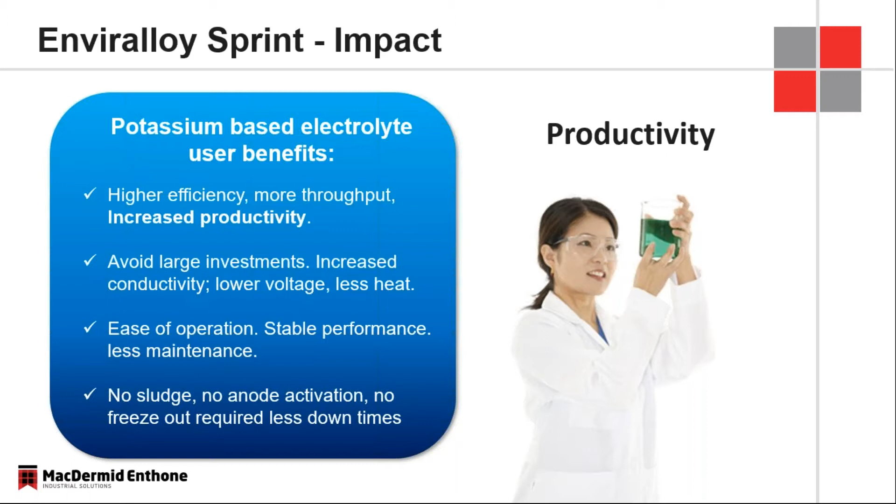We do not have that same issue with Enviralloy Sprint. It's a smooth, nodular-free, semi-bright silver-colored coating. One thing we know is that this is a particularly bright bath. We know that the increase in efficiency will change the grain structure.

I have some pictures coming up in a couple slides, but as a deposit is more smooth, less nodular, your eyes are going to see a brighter surface like a mirror, and pick up a brighter deposit rather than a duller deposit that might be a little bit more matte or not as refined. That goes to the fact that we are using a potassium system at a higher efficiency level.

We are still going to maintain excellent corrosion resistance, including higher corrosion resistance after heat treatment. We're going to have standard alkaline thickness distribution and alloy distribution that we have obtained from other systems. We're going to maintain that sweet spot of about 12 to 15% nickel, which is what is required by most OEMs.

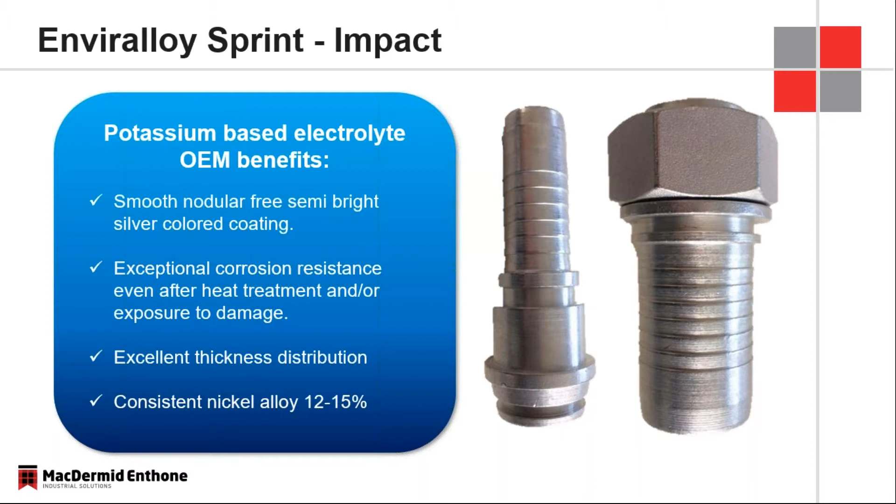So back in the sodium systems, we're looking at an efficiency of about 35 to 45%. When baths are made up brand new, they're going to be higher, and the efficiency is going to be reduced over time, pretty much because of sodium carbonate, but also to a lesser extent some of the breakdown products associated with the organic additives in zinc nickel systems.

A few years ago, we improved our sodium systems to raise the efficiency to approximately 55 to 65%. But more than that, we were able to reduce some of those breakdown products.

And breakdown products, as anybody who has run zinc nickel knows, are extremely important. You basically don't want to destroy the heartbeat of the system, being the systems that have these products in an inverse relationship to good versus bad. For instance, if you have a complexing agent, which all alkaline systems have, that's the good product. The breakdown products from those complexing systems really inhibit the efficiency, slow down the system, increase specific gravity, and need to be removed. Also with sodium carbonate, it has to be frozen out.

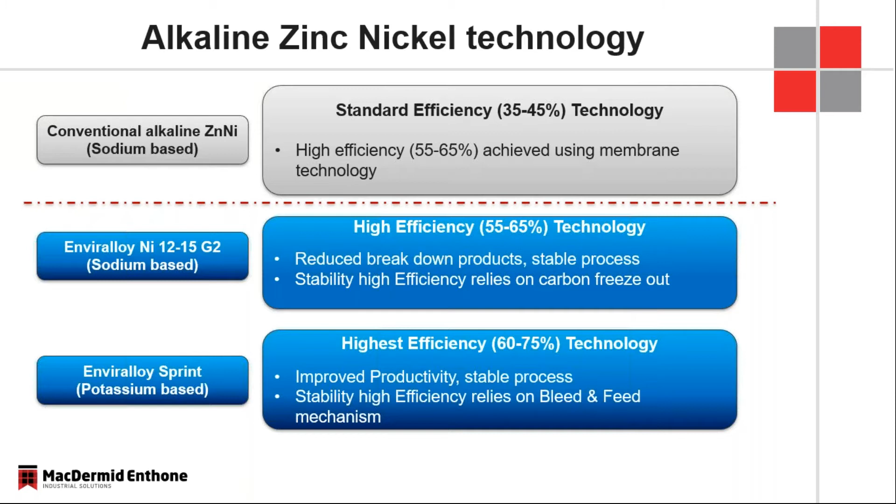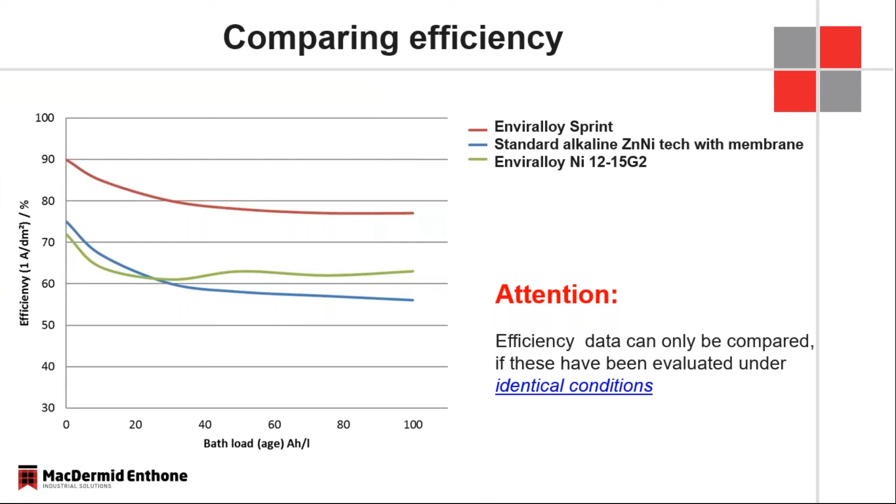Talking about numbers and efficiency, you can see that over time, standard alkaline technology will be reduced over a bath aging of approximately 100 amp hours per liter. The improved 1215 G2 is similar, although a little better, because it doesn't break down as much of the organic components. The Sprint process does have a reduction in efficiency, but we're starting out at a higher level, and when it does reduce, it levels off at a higher level of efficiency. So the benefits between 60% and 80 to 90% are significant. These comparisons are made against each other under identical conditions.

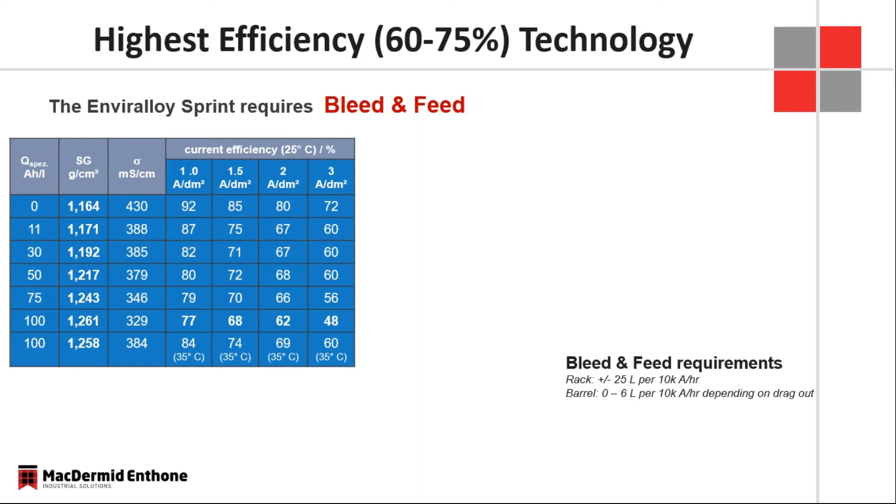So when we talk about the need for bleed and feed, what are we talking about? We're talking about the specific gravity of the solution, and breakdown products that take up space in that solution. There's only so much stuff, so to speak, that you can put into a gallon of solution, whether it's water or zinc nickel solution. At some point there's just too much that it can't handle and can't be solubilized, and things start to split out. So we monitor the specific gravity.

As mentioned, carbonate will not freeze out on Sprint because of the potassium hydroxide. But we can monitor the solution in an overall sense, not just the analysis for potassium carbonate, but an overall sense of how much loading we have into that solution, and we can follow that by specific gravity. You can see on the lower portion of this slide a rate of approximately 25 liters per 10,000 amp hours in a rack operation, and in a barrel operation, significantly less. We'd like to get down to where, if productivity is high enough, we don't need any reaction to a higher specific gravity. But if we do, we could be looking at as much as only 6 liters per 10,000 amp hours.

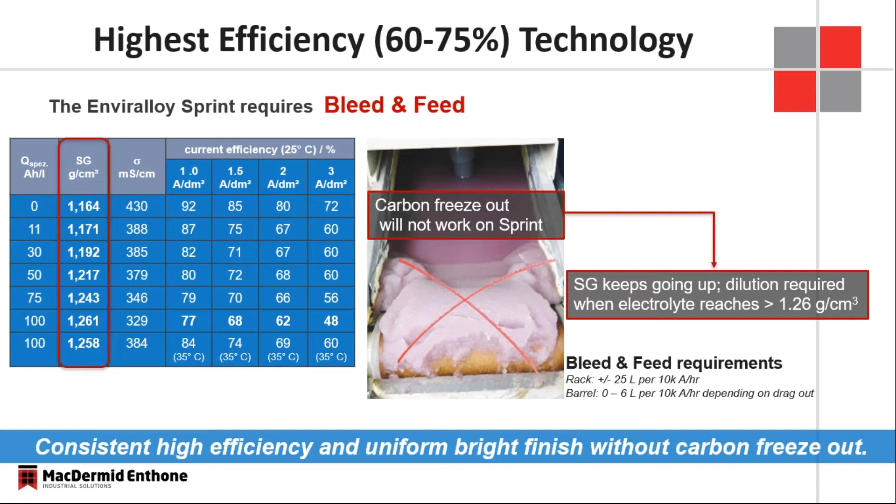Again, Enviralloy Sprint is designed to improve conductivity, and that's what we're talking about here. Improved conductivity equals improved efficiency equals faster deposition rates. I have some customer examples that I'm going to explain later on in this talk. The reduction in voltage and heat development — I found that out firsthand when I first started looking at this process in our pilot facility, for two reasons.

I was using a smaller type of tank, but I was only drawing 1 volt. I had a 6x6 inch barrel in a pilot lab facility drawing 1 volt, and I had plenty of amperage, but I noticed the barrel was not gassing. In a standard sodium-based alkaline zinc nickel solution that's brand new, everybody knows it's bright purple, and when you turn on that current, the bath almost explodes with hydrogen. We're producing so much hydrogen because of the lower efficiency that you can see a tremendous amount of gassing in the tank. When I was doing my trials, I turned on the current, only saw 1 volt, and saw no gassing coming out of the barrel.

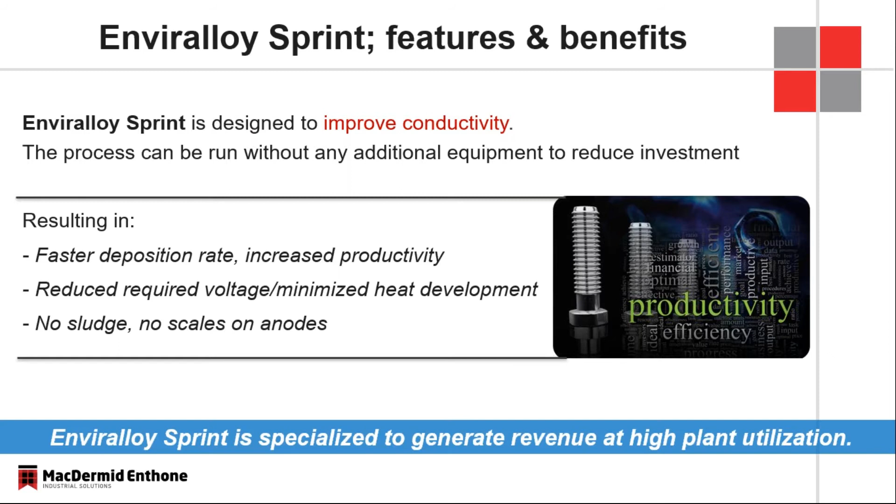You don't have the same issue with this system — no carbonate precipitation, high efficiency, no carbonate on anodes. Sodium carbonate will come out of solution very readily; it's one of the first things to get kicked out, and that's part of the sludge on the bottom, even though it's at a warmer temperature. But more important is the oxalate on the anodes themselves, or any sort of material on the anodes. We all know the anodes need to be clean and efficient, and in sodium systems this issue needs to be addressed, or your solutions will not operate properly. Again, higher productivity, less downtime.

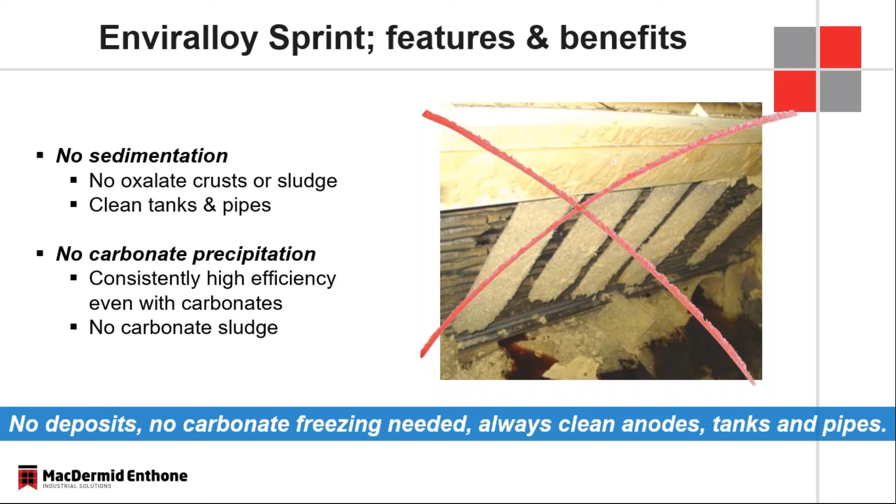A nice benefit about the Enviralloy Sprint is that it can be run rack and barrel out of the same plating solution. Most conventional alkaline zinc nickel systems require different metal concentrations and, more importantly, different brightener packages. Rack operations contain more anti-burn, high current density type components, while barrel, because you're plating at a lower current density, have lower current density additives in place of anti-burn components. In Sprint, you can run the same bath and do rack and barrel processing at the same time.

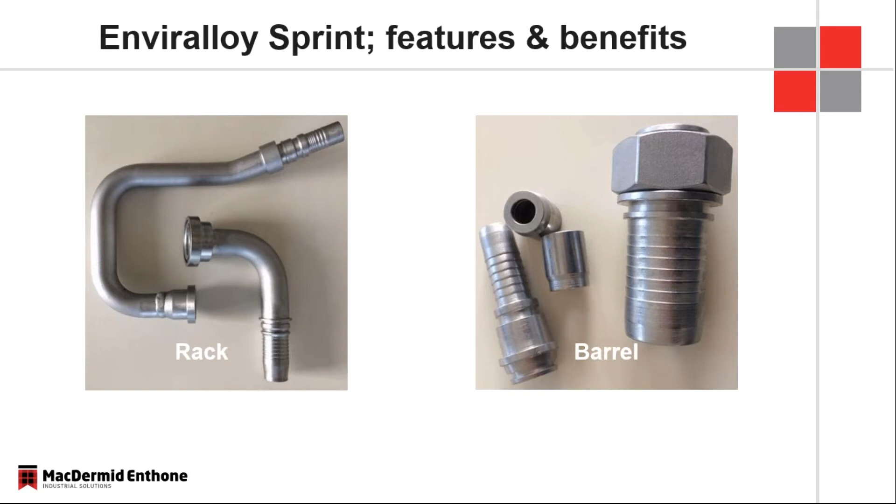So what does that mean for an applicator or an OEM? The less additives that we need or are required to put into any plating solution to add grain refinement have a possibility of being overdosed. If you can decrease the amount of grain refinement additives needed in a solution to produce a brighter deposit, you reduce the possibilities of blisters, poor adhesion, or delamination, particularly in any zinc nickel system. You saw some tubular goods on the previous slide. A lot of people like to plate and then post-form parts, bending, crimping. The Sprint, and we have seen this in a few operations, is much more ductile than conventional systems because the organic additives required for a bright finish are reduced compared to conventional sodium systems.

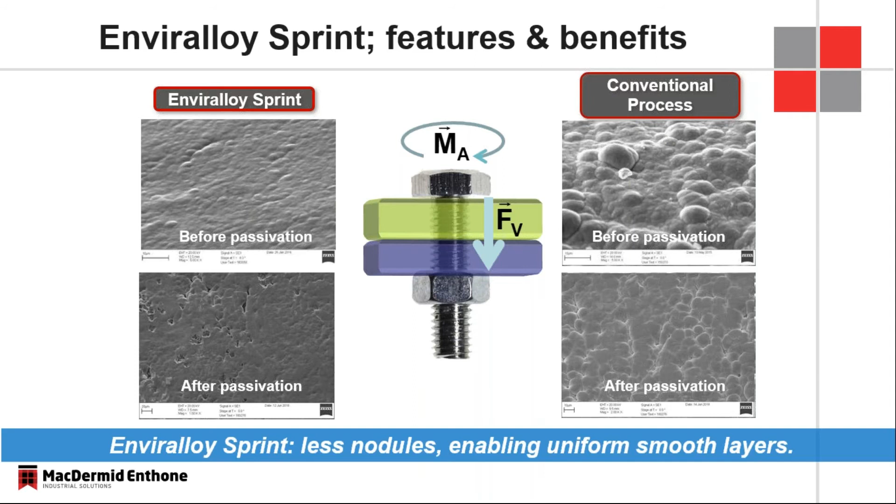So how do we operate this bath? Fairly standard operating conditions, except for the fact that you can run the Sprint a little bit warmer than you can a conventional system. Conventional systems at higher temperatures, that organic package, the complexing agents and whatnot, will break down significantly. Not with the Sprint process.

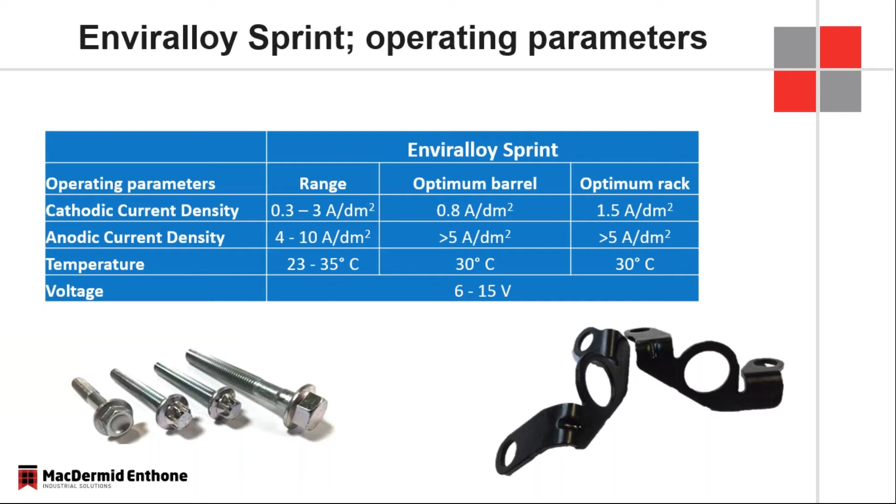One of the main characteristics that is very similar is the need for a high anode current density. That is still true with Enviralloy Sprint. 50 ASF and higher is recommended and needed for all alkaline zinc nickel systems, and that is the same for Enviralloy Sprint.

So when we start talking about additives, you'll notice that I've been mentioning the word Enviralloy Sprint, and that's because we have learned something since this product was released a few years ago. One of the things we learned is that by starting to add in a product called Enviralloy 1215 Part B, which is an additive we use for our number one selling alkaline sodium technology system, we reduce the amount of needed add-backs of the carrier. And the carrier is your complexing agent. The term carrier in this instance is not like an acid zinc carrier where it's a wetting agent. This carrier is the actual complexing agent that holds nickel in solution at a pH of 13.

Under normal operating conditions, by introducing some of the 1215 Part B, we start to be able to reduce the amount of carrier that is needed, which significantly reduces the cost per pound, per amp hour, however you want to categorize it, reducing the cost of operation because carrier consumption is reduced.

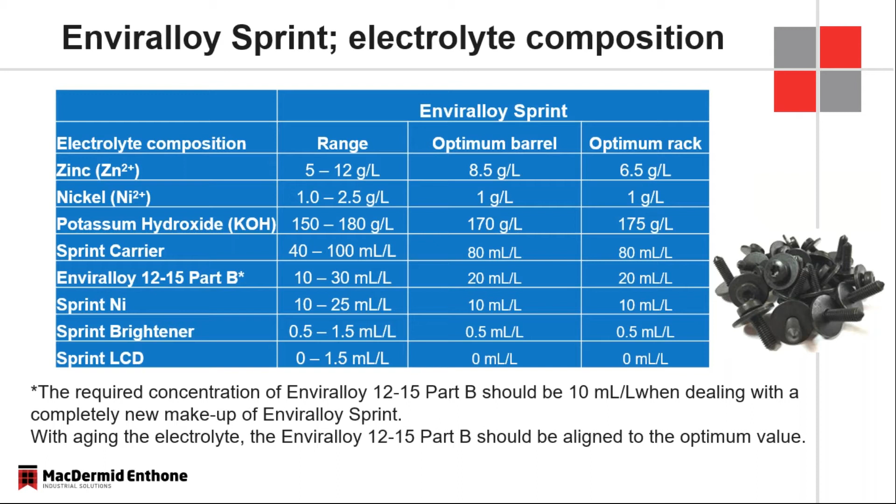The nickel additive is going to be one of your higher levels of consumption, and that's because that's what's getting deposited on the plating bath. It's not because we're plating out 30% more nickel. It's because we are productively putting through more solution, or more product, when you start talking about an amp hour basis.

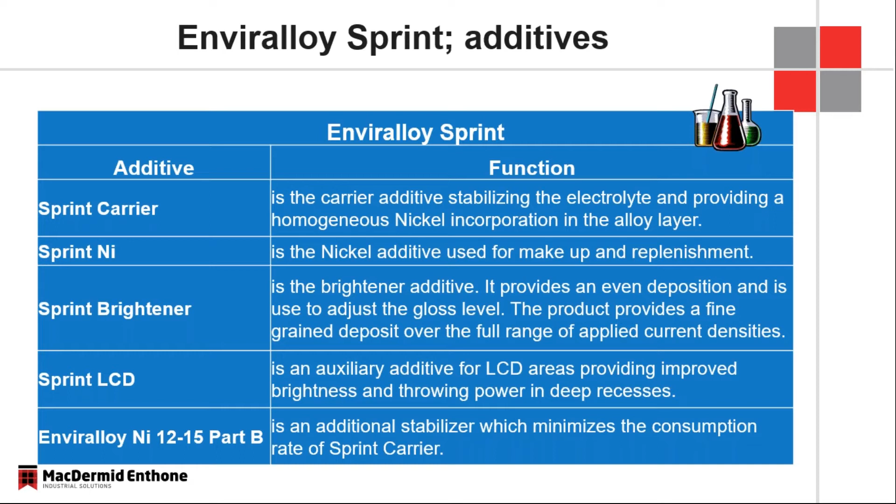So as I just mentioned, the carrier stabilizing agent, Sprint Ni, that's your nickel replenishment. It doesn't come off of an anode. It has to come in over the side as a liquid additive because it needs to be in solution before it hits the plating tank, or it'll precipitate. Brightener is a fairly standard brightener additive. LCD is low current density additives that are needed over time. And as mentioned, the 1215 Part B is just an additional stabilizer, and it helps to reduce the consumption of the carrier.

So what are we talking about for dosing rates per 10,000 amp hours? Looking at the first item, the Sprint carrier at 1.5 liters and the Enviralloy 1215 Part B at 1.5 liters, that's 3 liters per 10,000 amp hours. In the previous system, before our upgrade in technology, we were looking at rates of more like 4 to 5 liters of carrier per 10,000 amp hours. So we have significantly reduced the cost of operation for the applicator. Again, this is all relative according to drag out, rack versus barrel, and throughput.

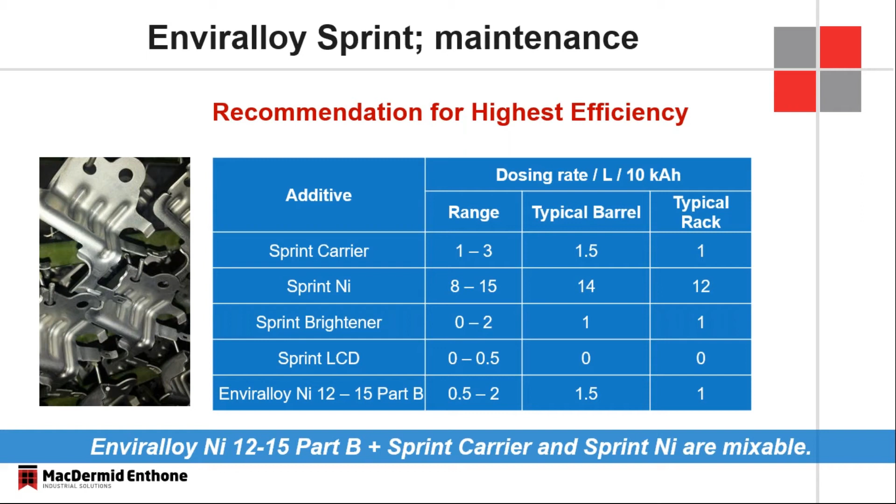As mentioned here, it might look like a lot of additives, but we really can mix the nickel, the carrier, and the Part B. That could be on one feeder, a second feeder for the brightener, and then the LCD would only be added as needed per hull cell analysis.

So this also goes to efficiency. This also talks about specific gravity. And since it is the number one cost driver, when we talk about 8 to 15 liters per 10,000 amp hours, we're talking about 20 to 50% more nickel consumption compared to the sodium process. That's because it's more efficient.

We don't need to have sticker shock by looking at that, but it's something that needs to be noticed. We are running more parts. More nickel metal is being deposited per hour. Therefore, that consumption looks abnormally high. But again, it's analyzable, and if you level off on a drag out rate, then we can certainly run on the lower side of that range.

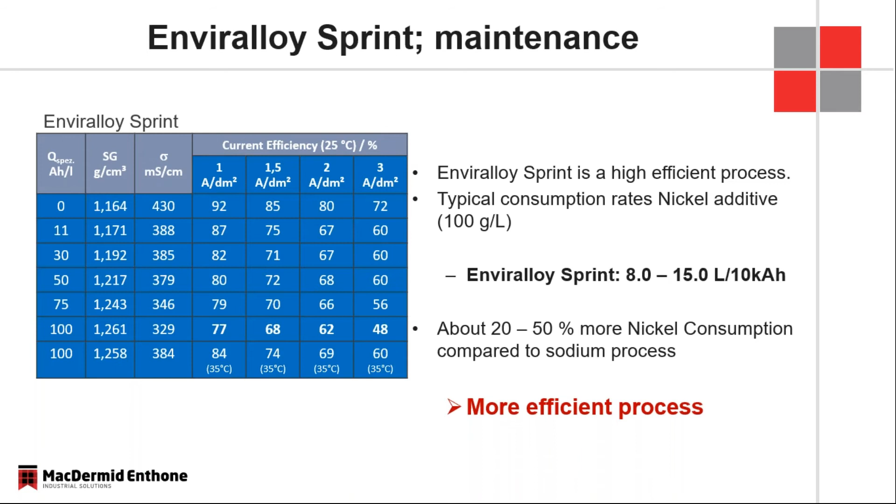So without overstating it, anode current density is probably the number one issue that you have to deal with when putting in a new line. Some of these complexing agents and products are very expensive. The last thing you want to do is purchase them, use them, break them down before they're ever functional, and then have to deal with the breakdown products.

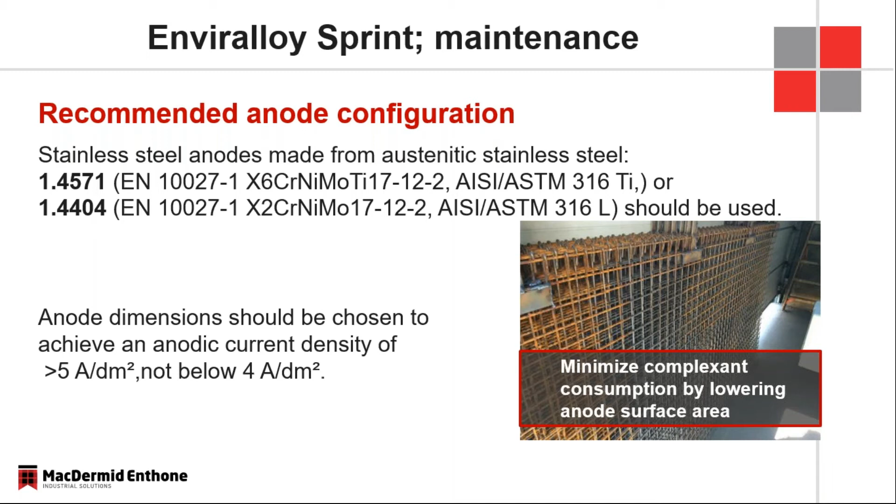And again, over 50 ASF is required, so a very small anode area. I didn't mention it, but it was on the last slide - we can also use stainless steel anodes. We prefer them to pure nickel anodes or nickel plated anodes, and that goes to the benefit, again, of breaking down the complexing agents in the electrolyte.

So in cases where we need to do bleed and feed, we are really just trying to maintain efficiency, trying to decrease the viscosity or the specific gravity. And again, that goes to increased conductivity. We're starting out on a high level - let's not go ahead and do anything that's going to lower it any more than we would expect.

So therefore, again, you can see on the graph with the bleed and feed at greater than 1.26 specific gravity, we're going to maintain that high level of efficiency. And if we don't, we're going to see a decrease down to below 50%. So again, 20 to 25% increase in production - that's what we're talking about here. That is what really gets this system to the top of the list of preferred systems for alkaline zinc nickel.

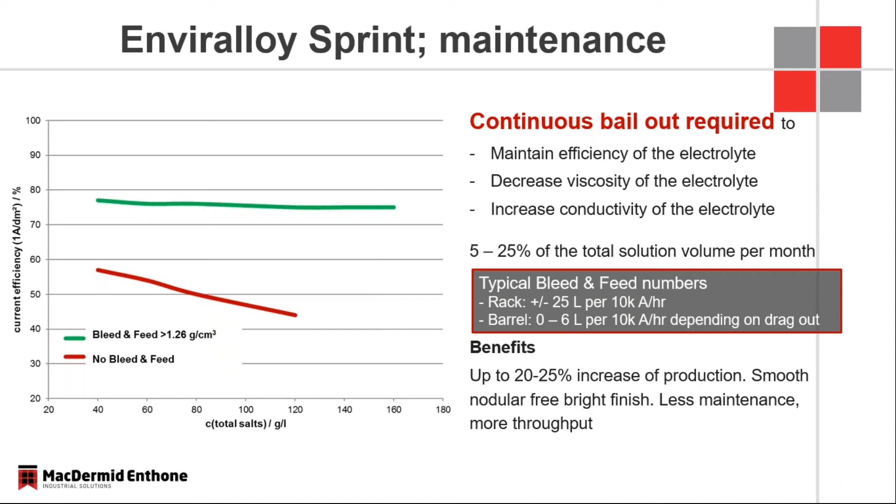The other thing before I talk about customer experiences, in generalities, what are we talking about? Fasteners, right? We're talking about plating fasteners in high production environments. When we start getting into higher strength steels, we all know that the OEM industry, the automotive industry, is reducing weight on vehicles. Therefore, they're going to smaller, stronger, high strength steels as fasteners to save weight.

We have applicators, and we know of instances where the initiation of a system that has an efficiency of 45% is not going to initiate on a 12.9 bolt. It's not going to initiate on a high hardened steel like a 12.9, or even some of these exotic alloy steels like molybdenum, or other metals and alloys that are put into the steel to increase that strength. The higher efficiency allows us to create faster initiation.

So right off the bat, if you're an applicator that plates high hardened steel all day long, you're not going to be plating for 2 hours because the initiation never takes off. The Sprint, we have seen and know that it can plate high hardened fasteners very, very readily on a very consistent basis, and that's another extremely advantageous point to this system.

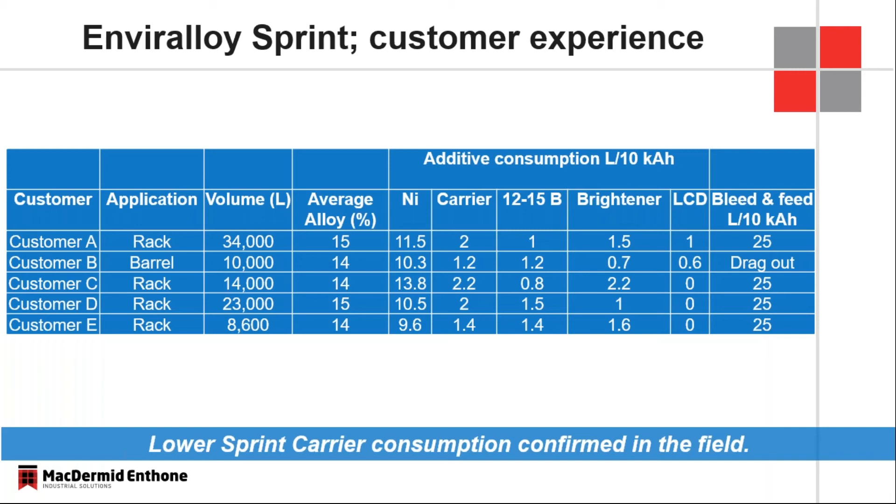So in a rack operation, we have an applicator that does use bleed and feed, 25 liters per 10,000 amp hours, and was able to reduce his plating time from 80 minutes to 60 minutes while still obtaining the same thickness. It's a big number, 20 minutes saved.

In a barrel operation, we've seen plating times reduced from 60 minutes to 45 minutes with no requirement for bleed and feed. So we're getting more barrels per hour. We're dragging out more of that carbonate, more of the breakdown products from the complexing agents and brighteners, and we're able to maintain a very bright finish as well.

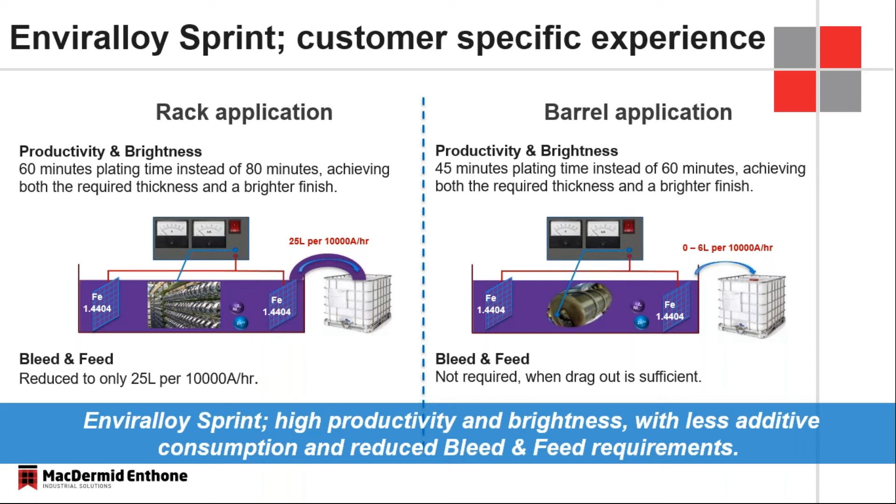So again, lower carrier consumption reduces cost. That was one of our number one cost drivers when this product was first released, and we've addressed that.

Plating bath doesn't really burn. We've run high amperages and seen no burning, and it's been very, very good performance in that rack application. And also the LCD is good as well—there's not a lot of troubleshooting to clean up dull, low current density areas.

And we say Enviralloy Sprint will replace Zincrolyte Sprint. That was the move to adding the 1215B.

That thought process was originally discovered in some of our European clients, and in talking to some of my colleagues in Europe, as soon as the technical service team found out that this additive would lower carrier consumptions, we just put it in across the board and never had an issue. We lowered the carrier rate, increased the 1215B rate, and everything got reduced. The less stuff you have to add to the plating bath, the more efficient it will be.

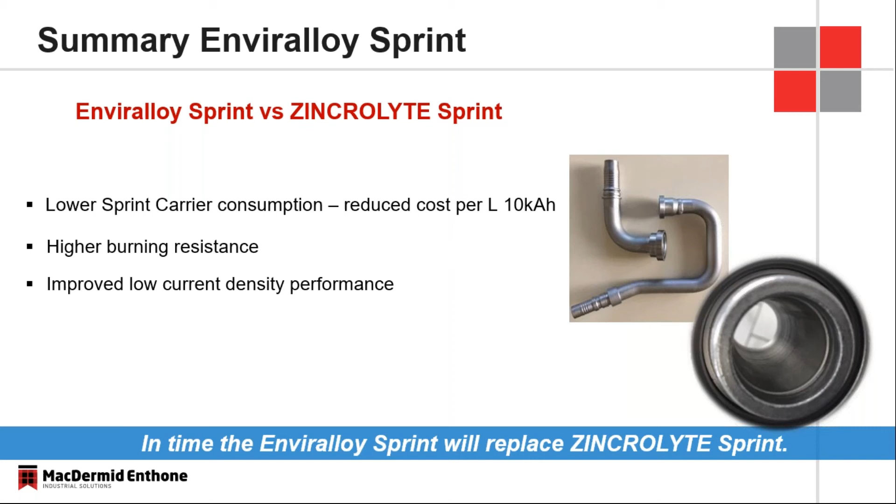Some of the other customer findings: higher plating rates, good production parts even at higher levels of potassium carbonate. The potassium hydroxide runs at a similar concentration to sodium systems, about 120 to 130 grams per liter.

Again, they've also found the same things we've been talking about: high conductivity, less energy consumption, less strain on the cooling system, nodular-free bright deposits, excellent metal distribution, uniform appearance, no sludge, no scales on the anodes, and no freezing out when you are running a high productivity shop.

So one thing we've actually done is, based on pure math, determine what level of productivity is needed to take advantage of this system without having to freeze carbonate out. Parts are going out the door at a higher rate. So this is a system made for a high productivity shop.

This is not a system made for someone who just has a zinc nickel tank in the corner and runs zinc nickel every once in a while per customer demand. We've worked out the numbers. We know the level of throughput where this is advantageous versus where it's so disadvantageous we wouldn't recommend it, and we'd recommend a sodium system instead. We have that data, and it's valid.

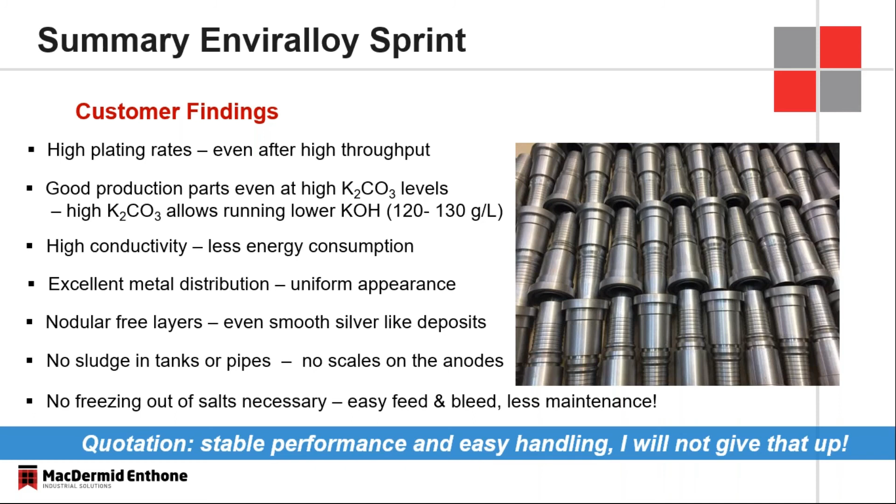So with that, I will answer any questions that you happen to have. If Rob has captured them, I'd be happy to answer them.

Hi, Mike. So we do have one question for you so far. What is the average thickness in the rack application at 60 minutes? And the same for barrel, what's the typical thickness in 45 minutes?

I saw that information, and for a rack process, 60 minutes does seem fairly long. Every line is different—we deal with that question a lot in our pilot lab. We run different plating jobs for different potential customers or existing customers that just need some work. That's one of the bigger questions our team has to look at: how is the plating solution functioning today, and how long do we have to plate these parts to obtain the required thickness? Most thicknesses for zinc nickel are minimum 5 microns, standard 8 to 10 microns, and too high would be 13 to 15 microns.

Because of the increase in nickel into the zinc nickel deposit, ductility does become an issue. It's not as much of an issue in this case because the Sprint is more ductile, but you never want zinc nickel to be over 13 microns because you have the susceptibility for cracking and delamination. You need 5 to 8 microns to meet your standard 1,000 hours of salt spray.